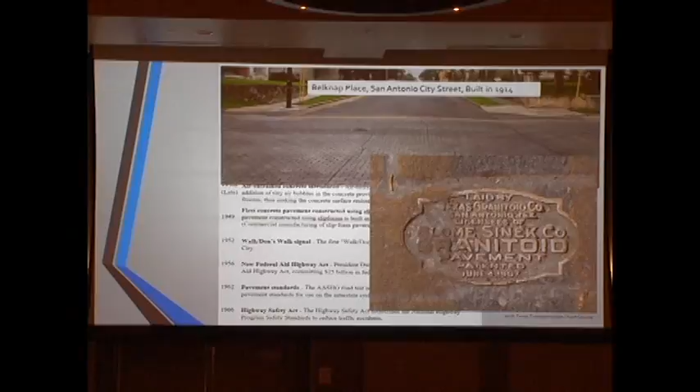I was very fortunate to know the TxDOT photo librarian, Ann Cook, and she very graciously gathered a few historical photos for me for this presentation.

Hey, I just realized another thing that's going to be different not having Dale Rand here, because if Dale Rand was sitting there, I think he'd probably say, hey, Lisa, is that you? Oh no, that's a mule or a donkey or something. He'd make some joke like that and I would just have to go, ha, ha, ha, ha. That was really funny. And it usually was really funny.

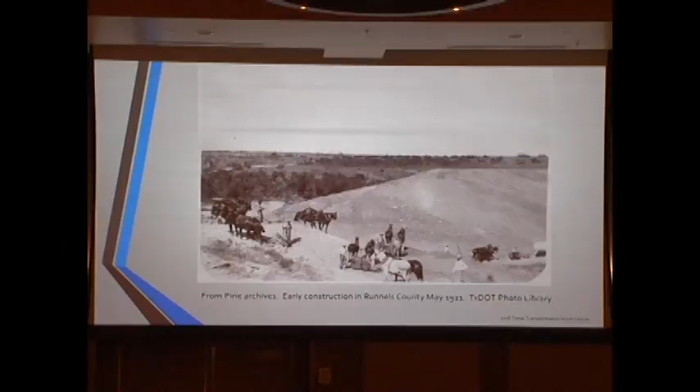This is what a construction project in the San Angelo district looked like in the 1920s. Obviously they had motorized equipment, but you weren't going to get it up those types of hills and whatnot, so still quite a bit of animal-powered graders and material removal equipment.

One of those things that is never going to change is that when it comes to a paving project, we are always waiting on the dirt guys, right? It doesn't matter how fancy the equipment's going to be, that is the bulk of the time there on any new location project.

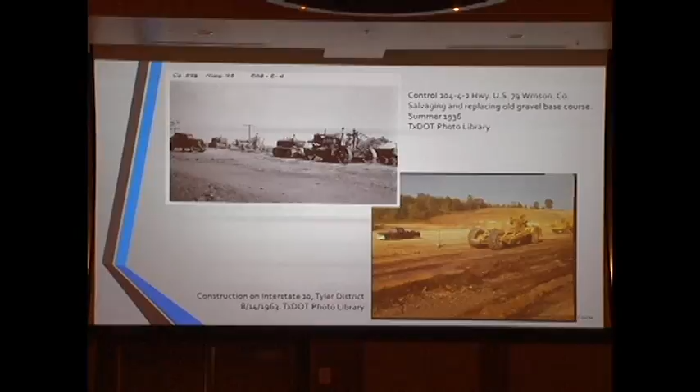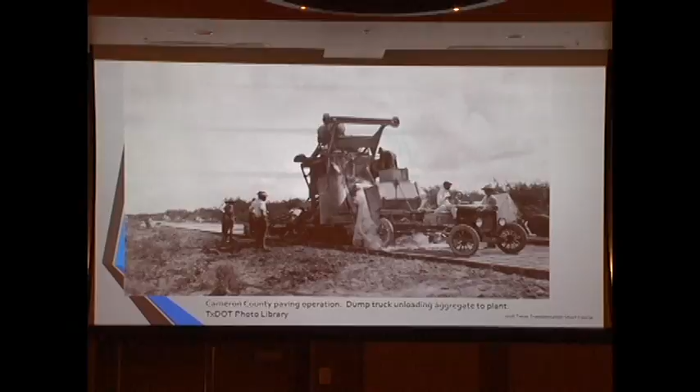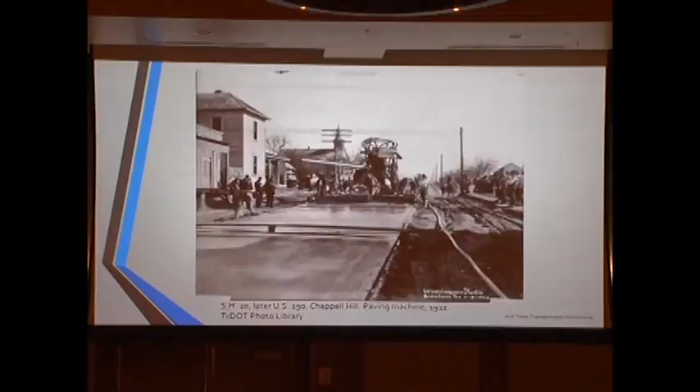The Wichita Falls District was a great early adopter of this new technology, this modern technology called a concrete highway. There's a little publication that's free about this early foray into the concrete highway system done by Wichita County.

Remember, in 1921-22, the highway department existed really for one reason: to get the money from the federal government and Bureau of Public Roads, et cetera, and then to distribute that to the counties. So the old THD at the time was not founded to do construction and design and inspection, and in fact, it wasn't until several years after the highway department's founding that they actually started taking maintenance of roadways.